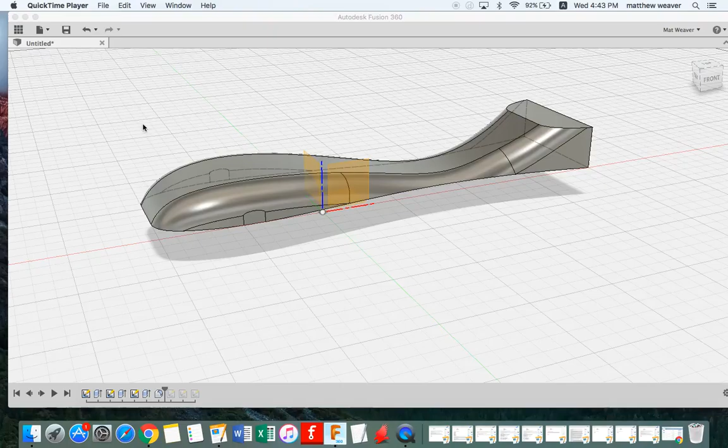I showed you how to make the body for your Pinewood Derby. What we're going to do now is make the wheels.

It's important that when we do the wheels, we do them as separate bodies, and I'll keep emphasizing making them a separate body. What we do here is turn the origin on.

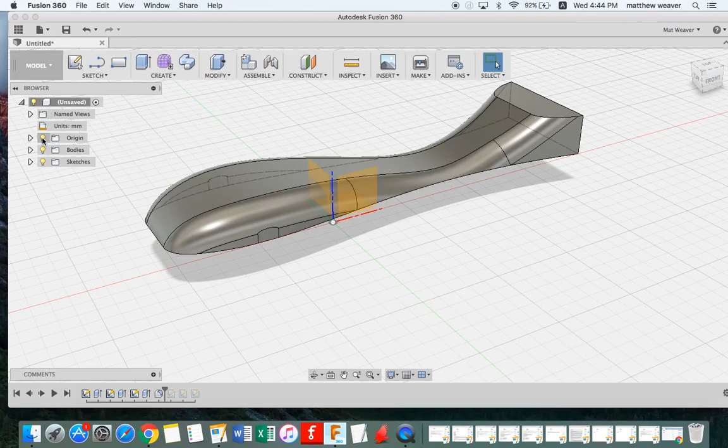We're going to right click the origin, create a new sketch, and what we're going to do is draw a circle.

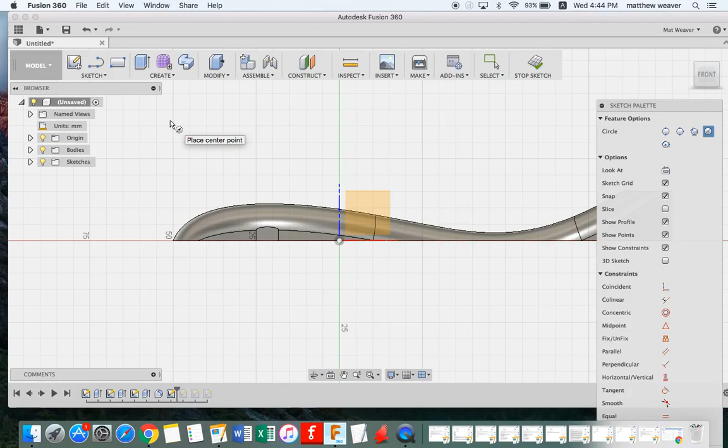I'm actually going to draw the circle where I want the wheel to be, just to give it some proportion.

So zoom in here, and you can see there's the dimension. Now sometimes you can actually put your own dimension in, but for some reason it's not allowing me to do that at the moment.

So I'm just going to have to try and be as accurate as possible. 13.073 is pretty accurate - my wheel was 13 millimeters. I don't know what yours is.

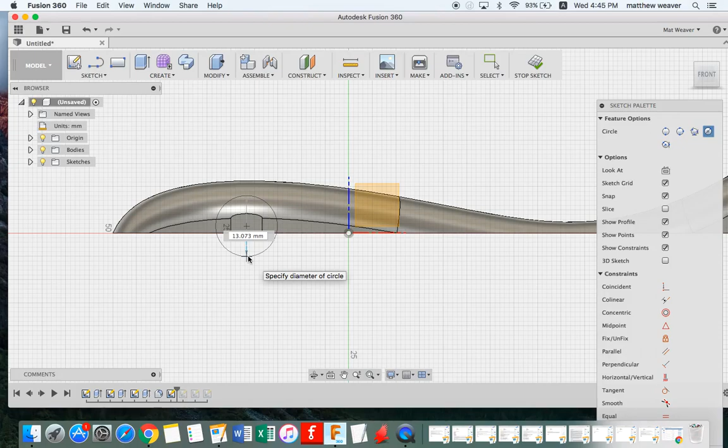I'm going to click that there, and now you can see that's a nice circle, and it's been shaded. I'm going to go to my bodies here.

This body one is the car. I'm going to hide that. You don't need to, but...

When we make this wheel, if I leave the body, it might stick to the actual body. When I make the wheel, it might stick to the body. I'll show you what I mean.

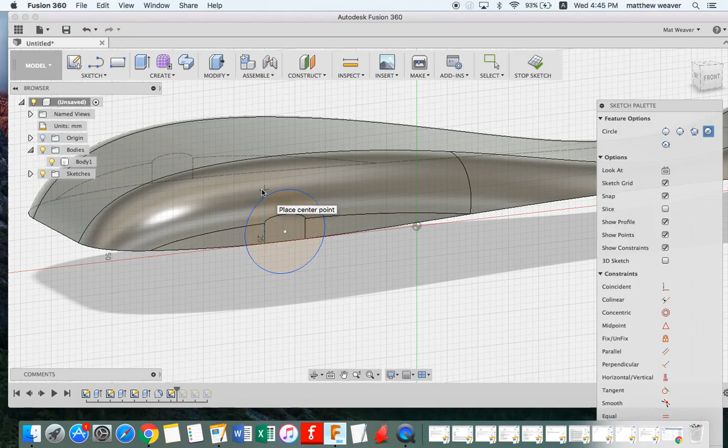Go extrude, select this. You've got to make sure that the wheel and that don't join. You see how it says join here? That's no good - if you join it, it's going to be very difficult to separate. You'll have to do some other things.

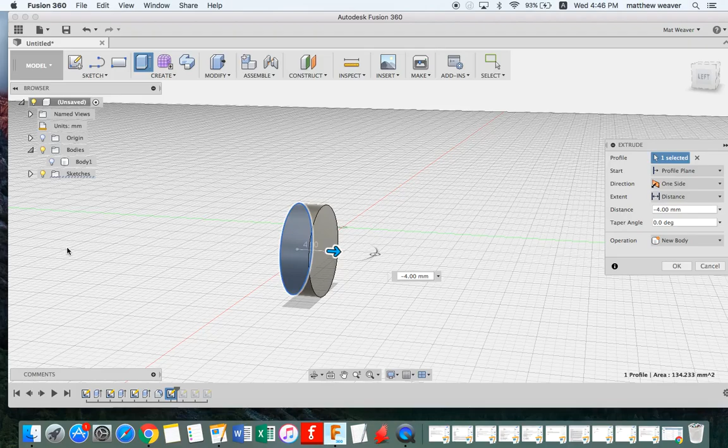So what you do is go new body. The alternative is you just hide that body, and then it will automatically be a new body. I'm going to press OK to that. Now you can see I've got two bodies.

If you've got two bodies at this stage, everything is good. If you've got one body at this stage, then you've made a mistake, and you'll either have to undo it, or you'll have to split the body.

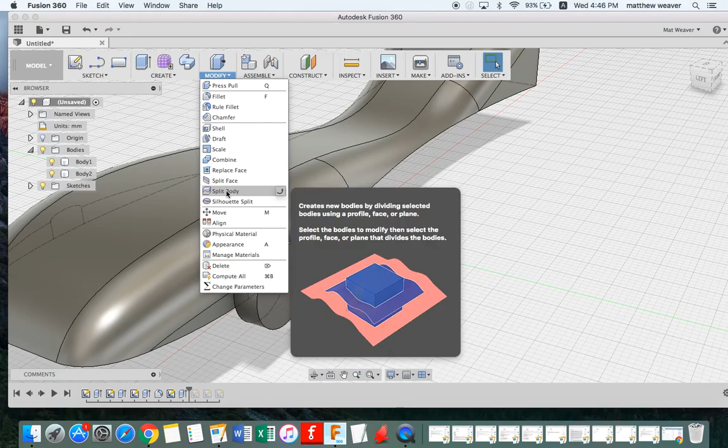Now that's modify and split body, and that's where you select the body and select the thing that is going to split it. I'm not going to go into it because you shouldn't have made that mistake, but the thing that's going to split it will be that line, and that will take away the wheel.

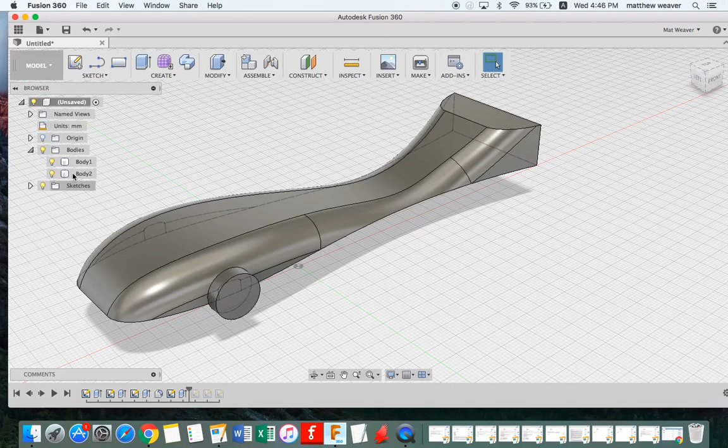Obviously your car's got 4 wheels, regardless of where your wheels are exactly - there should be 4 on the car. So I take body 2 and right click on body 2, not on the wheel itself, and copy, then right click on body 2 and paste.

Now it's going to come up with a cursor or a load of arrows. Self-explanatory - that arrow will push it there, and that arrow will push it there.

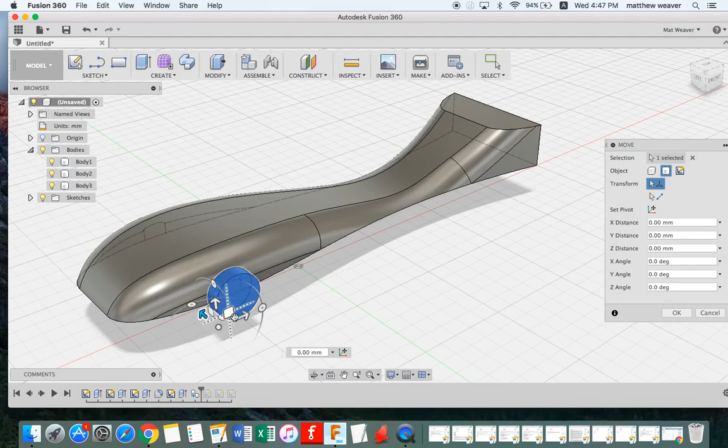Simple stuff. So I'm just going to do the wheels on this side first. They are actually the same length.

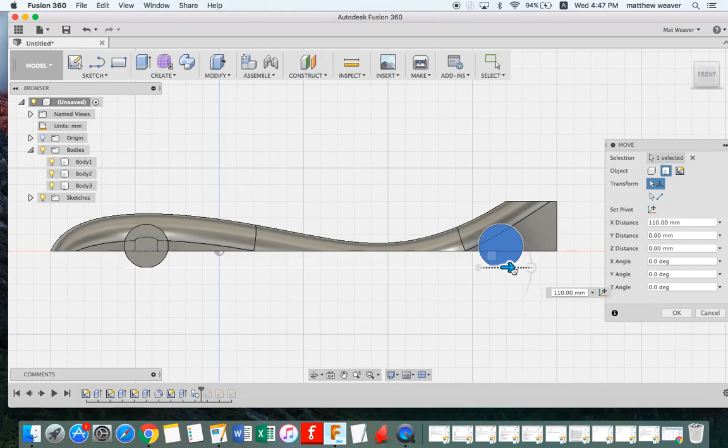However, because of my design, it looks a bit wrong, and my car wheel is right at the back there.

Okay, so now I've got my wheels. You can see that that's not properly joined - that would be a bit naughty. I would need to make that joining, but for this purpose of just using CAD, don't worry about it too much.

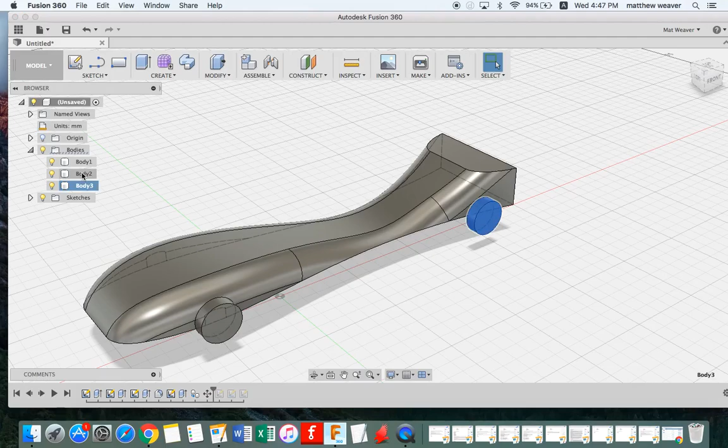Okay, the next one is body 2, body 3. I press shift and select, just like you normally would, and then press paste.

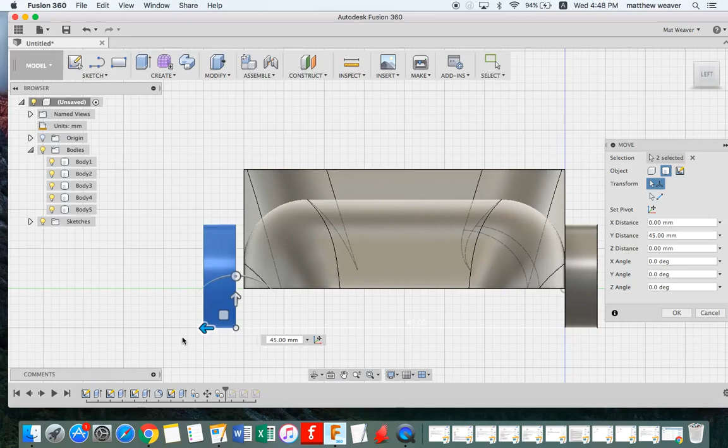And now I've got 2 wheels, another 2 wheels on top, and I'm going to use that one here to just move these around. Okay, and there, look at that - nice and accurate, and then OK.

Okay, so that's how I made the wheels. So what I'm going to do now is stop the video, and then go into rendering, because otherwise the video is going to be too big.